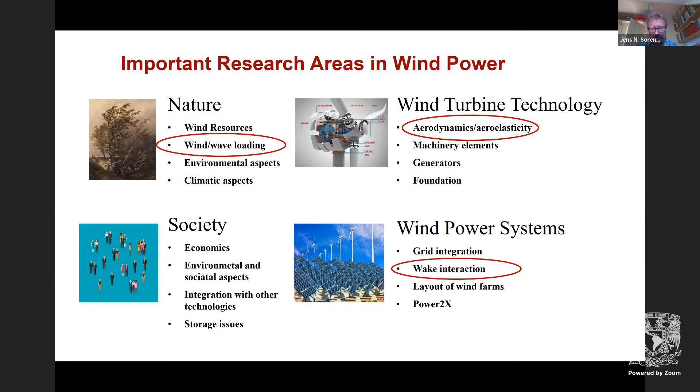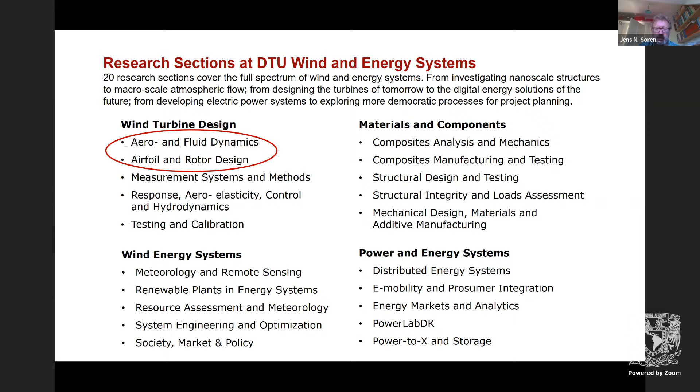So let's go a little bit into what we are doing in my section. What I normally say is we are doing advanced wind turbine aerodynamics, both modeling and experimental validation.

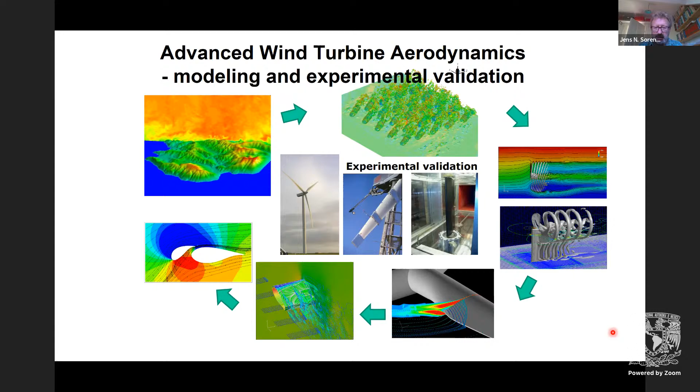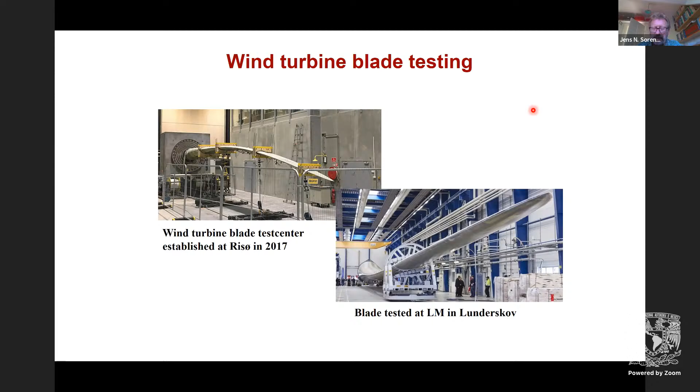And that's really a nice facility to have, and that also makes that we have a very good collaboration with industry, which we always think is very important when you're doing wind turbine research. The total number of people employed at the department is about 450 now, so it's quite a big department. We are only doing research with respect to wind power, but it is a big industry in Denmark today.

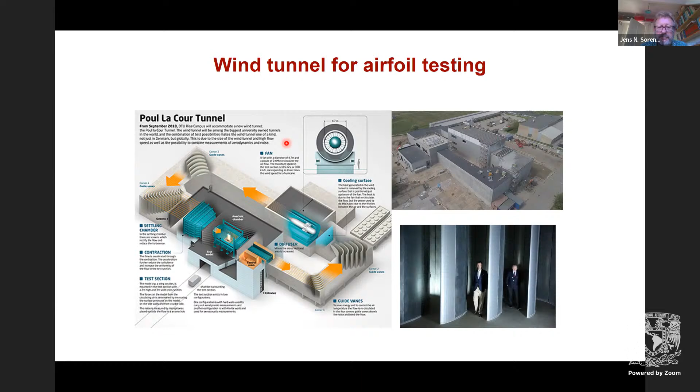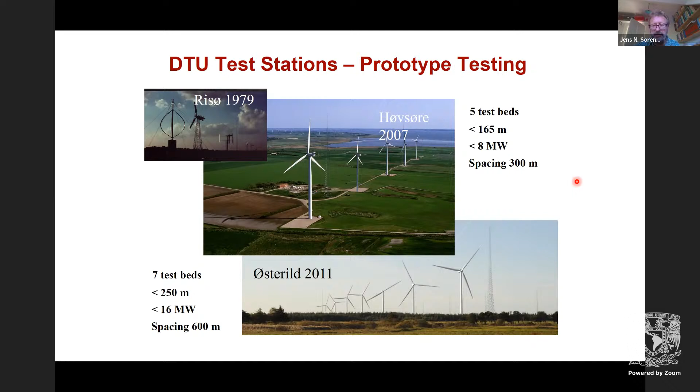And that we do for industry. In 2011, we even went out further and more close to an area very close to the ocean, Østerild. This is a picture from Østerild today, which is a national test center for large wind turbines. We have 7 places now for these wind turbines, and 4 of them are already occupied by companies. The rest we rent out to whoever wants to rent them, and they're fully booked all the time.

What we do here, we have a small group - I think there are 5 persons helping the companies do the experiments, with experimental equipment, but the data are of course confidential. So this is where the big companies run their tests.

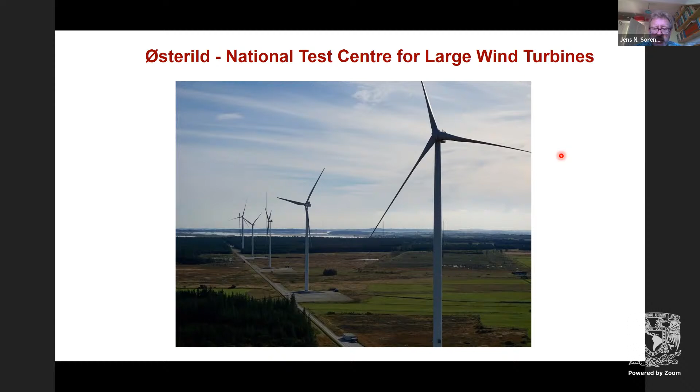A little bit back to what we are doing in my section. A lot of what we're doing is based on CFD, computational fluid dynamics, and probably no secret for any of the audience here, but the basic elements in CFD are that you solve the Navier-Stokes equations. You need to make mesh generation, you need to model turbulence, you need access to efficient computing algorithms or you need to develop some, you need access to high-performance computers, and then you need good post-processing facilities.

And today that has become really a standard. But we have developed our own CFD tools through the years, starting about 30 years back, and we have some tailor-made CFD codes that we use as part of our research. But I think many people now use OpenFOAM or other kinds of CFD tools that are available online.

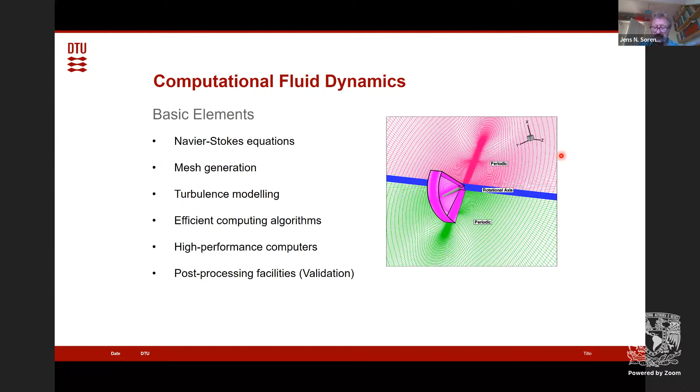Just to give some examples of where we use this, there's the EllipSys code. It has both a 2D version and a 3D version, and we use it for example for airfoil simulations, two-dimensional airfoil simulations. Then we use Reynolds-averaged Navier-Stokes simulations, or unsteady Reynolds-averaged Navier-Stokes simulations. These you can keep in 2D, and that is typically when we do design of airfoils. We use this technique.

Then, if you want to learn more about the aerodynamics on the airfoil, you go to 3D, for example large eddy simulation or detached eddy simulation. There are different types of closures you can use with respect to turbulence. And also we have started recently doing some DNS, direct numerical simulation. These do not demand any closure of your equations with respect to turbulence, but they're very computing expensive. But we can gain some information that can be used in your models.

Then we also have rotor and park simulations, and there are different kinds. A few of them are fully resolved geometry - there you can only afford typically to compute the flow for a single turbine in the near wake. Otherwise, you have to go to actuator line or actuator disk modeling. Then you can have more turbines in your simulations. I'll come back to this later.

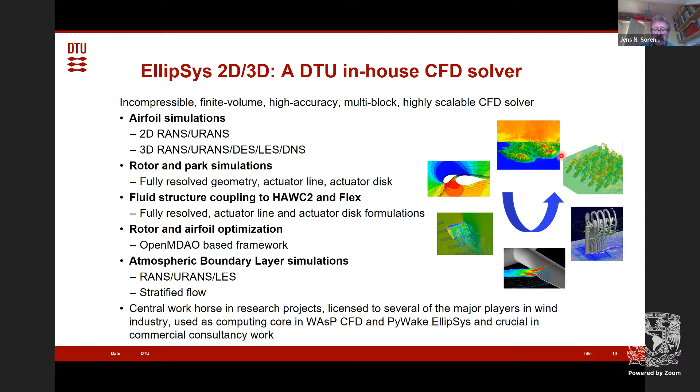So what kind of research do we do? One could say wind turbine aerodynamics should have been mature by now, but actually it's not. Some of the reasons are that rotors are becoming larger and more slender, so there's much more dynamics of large deformed rotors.

For a wind turbine rotor of more than 100 meters, typically it's pre-bent, and the deformation of the tip while operating can easily be 3 to 4 meters, which you need to include in your simulations. So this creates some complications.

Also, it's a complex geometry. When talking about grids, you need a grid that covers the rotor blade but also one that is steady. So you need interaction between these two, because the tower is steady whereas the rotor is rotating, requiring overlap between the gridding.

We've also looked at new concepts like introducing adjustable trailing edge flaps, as you have on aircraft. We tried to simulate that, and also tried to put a real trailing edge flap on a megawatt turbine to see the effect of that.

Also, wind turbine blades today always use what we call aerodynamic accessories - for example vortex generators. There could be blowing, Gurney flaps, or roughness tape, but at least vortex generators and roughness tape are really inherent in nearly all design of wind turbine blades today. So we need to be capable of modeling that as well.

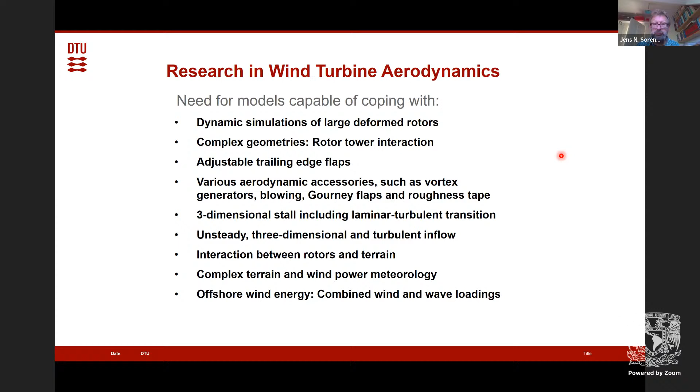But first, let me go back to a very old, relatively old simulation - the first CFD simulation, probably the first ever. That was done by my colleague Niels Sørensen, in association with the American blind test competition in 2000, so it's a little bit more than 20 years back.

What he showed in these competitions - if you follow here, you see the red spots on this blade, which was tested in the NASA Ames wind tunnel, where there were pressure taps. So it was a blind test - nobody knew about the results. And when we saw the results from a lot of research groups worldwide, there was a big scatter. But there was one simulation that turned out to be very consistent, coinciding with the experimental data, and that was this CFD simulation.

As you can see on all cross sections, the solid curves are the computations, and the circles are measurements. And it's a pressure coefficient.

This is not so important, just to show you that everywhere there was a very good comparison, both near the tip and near the root, except at one place. If you look, the measurements did not show any trace of a pressure peak or suction peak, as you have here.

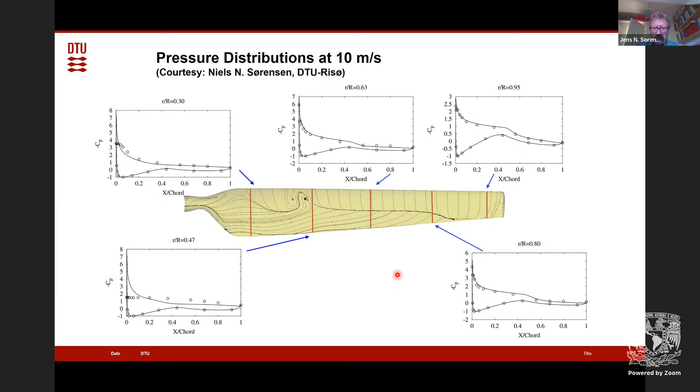So that was actually the first eye opener that doing CFD on wind turbine blades is very important, and that you can actually gain some new knowledge compared to what you otherwise would have. Since then, we have used CFD for many different purposes.

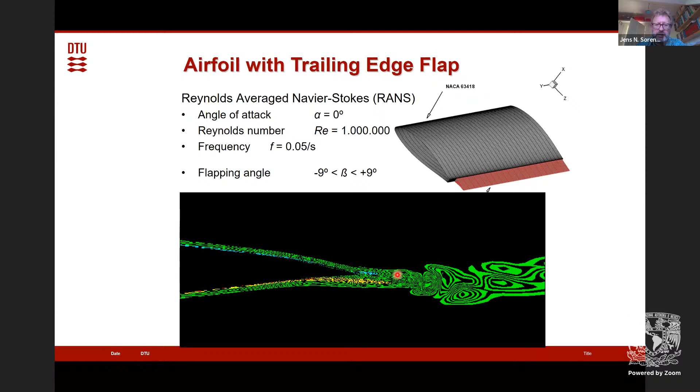For example, we have looked at airfoils with trailing edge flaps, as you can see in a simulation here, to see what are the effects if we can control some of the flow behavior around the airfoil. That's one case. Another thing here, we use the CFD technique for design of airfoils.

You can see here the dynamics of doing different simulations. Wind turbine airfoils have very specific properties. They are actually very different from aircraft airfoils, because they need to be insensitive to roughness.

That typically means, as you can see here, that the leading edge gives a very specific shape, which looks a little bit like a whale, the shape of a whale. That is because you want transition to take place before you reach the suction peak.

So in order to have this phenomenon where you get insensitivity to roughness - the reason why you want that is that roughness will always appear because of things like insects in the air, dust, rain. Therefore, you'll always have a surface that is not exactly equal to a smooth surface as you have on an aircraft. And you never clean a wind turbine blade - you don't do that because it would be very expensive, and many times you can't do it.

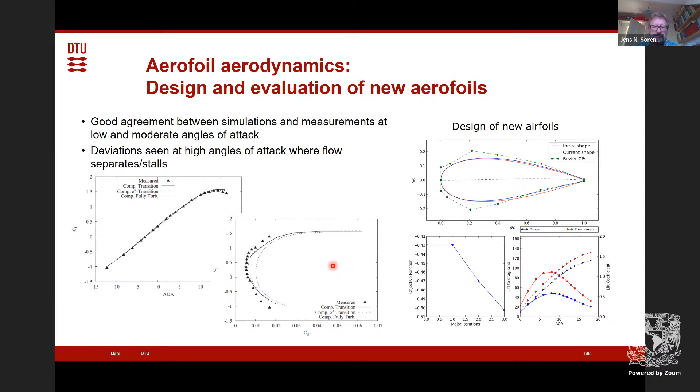Another thing we also use the CFD for is to extract airfoil data, which we call 3D airfoil data. They are different from the 2D ones because, due to Coriolis and centrifugal effects, they are modified.

They're actually mostly modified near the root, where typically you also have separated flow. But by doing analysis of the resulting computations, you can actually come up with corrections for the measured airfoil data - the airfoil data that's measured in the wind tunnel.

We have done this many times, in different ways, and it seems now it is actually possible to come up with very good corrections for these 3D effects and put them into some simplified formulas. But everything is based on the CFD simulations here.

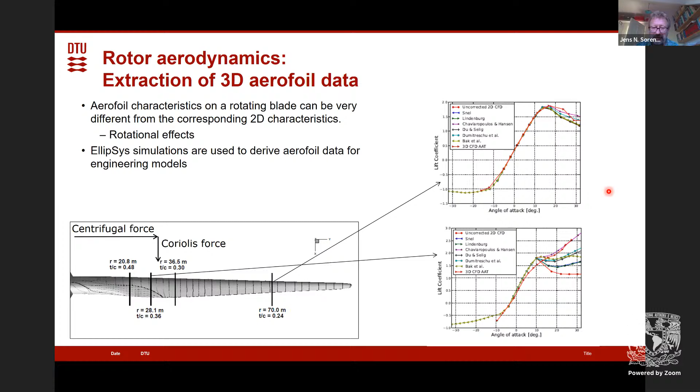Also, the vortex generators I mentioned before - we do some research on those. So we have developed a new type of vortex generators, as you see here. They are kind of shaped like a delta wing, and they are a little bit better than the usual ones.

We hope we have a contact with a company and hope that they would be interested in developing it further and maybe using them in production.

In this case, we have actually put them into our CFD solver and solved for the full flow field. So there are essentially two ways you can do a CFD simulation along a surface with the vortex generators. The way they work is that they create two strong vortices behind them, which helps mix the boundary layer with the ambient flow, and that strengthens the boundary layer and makes it stronger towards adverse pressure gradients.

But the other thing is, if you want to do it for a full blade, you cannot model them in detail, so therefore you need to put body forces into your computational tools. We have also done that. So you can both design a blade with vortex generators, and you can design the individual vortex generators in order to give them optimum performance.

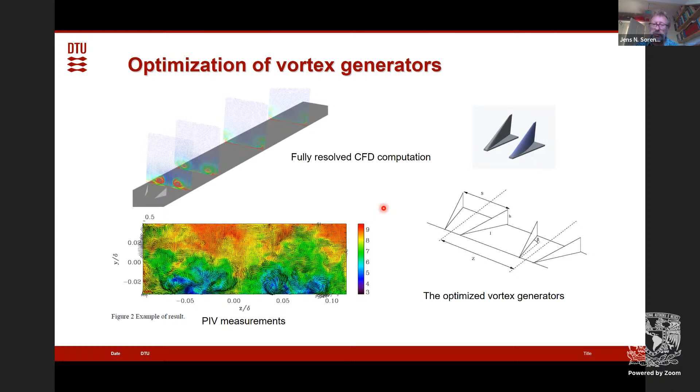Integrated aerostructure design is something we're working on now. We have a lot of computing codes that we need to combine, because they need to go into the details of what materials you use for the blade and how the inner structure of the blade looks like. That means you optimize the blade not only for performance, but also for lifetime, for example, in the same process.

This is an example of this, where I won't go into detail, but we have a lot of different codes you can put in. You can increase the complexity of types of materials and also the design of the inner part, and you can gain a little bit on that. We hope that in the long run some of the wind turbine manufacturers will start to consider this, because they can save a lot of money by saving material when they design the blade.

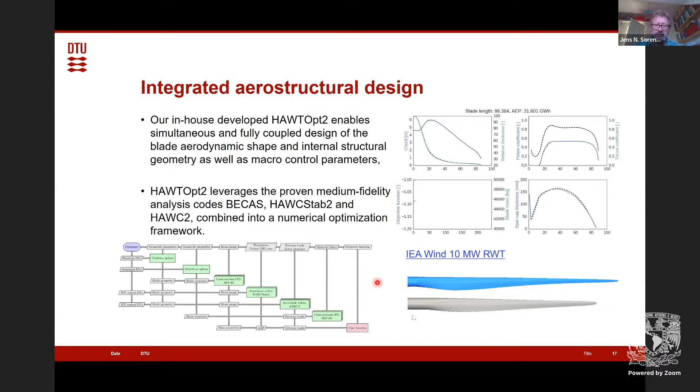This is a little bit the same here. We have different techniques, but one thing that's very important is to have an adjoint solver, in order to make huge computations, looking for steady solutions and design solutions. We are working on this adjoint solver and are pretty close now to having a fully developed adjoint solver for this EllipSys code. This is work that has been going on for, I think, 5 years now, but we are getting closer.

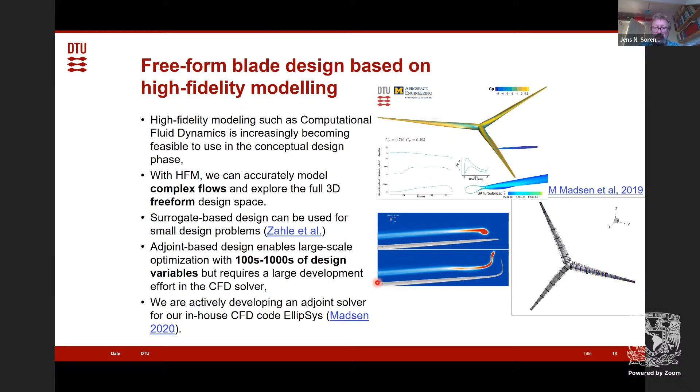Just to finish about the rotor stuff, we are doing this too. For example, we have been looking at winglets, as I mentioned before, rotors with slats. We have been looking at hub design, specific hub design, and also putting in vortex generators. So just some examples of CFD use.

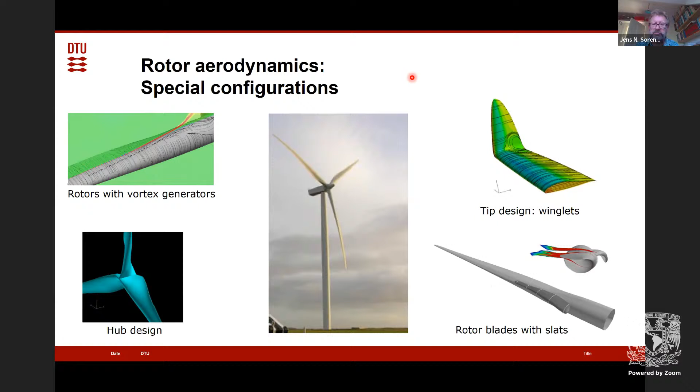But now I'll talk a little more about the actuator disc and line technique. Up to now, everything I talked about is when you have a fully resolved rotor. The point is, if you want to go into a wind farm, you need to do something with the rotor, because you simply do not have the computational power to resolve the boundary layer on a rotor blade at the same time as you want to solve the flow in a wind farm. So you need to focus on part of it.

That's why we developed this so-called actuator disc or line technique. The basic idea is that we replace the rotor blades with body forces, which we determine from airfoil data, and then the flow is simulated typically by large eddy simulation. What you see here is a domain, and it can even be long. Now this is only one turbine, but it could be a complete wind farm. You typically use an actuator disc, sacrificing some of the mesh points on the blades or rotor disc, and instead use them for the large scale structures in the wake.

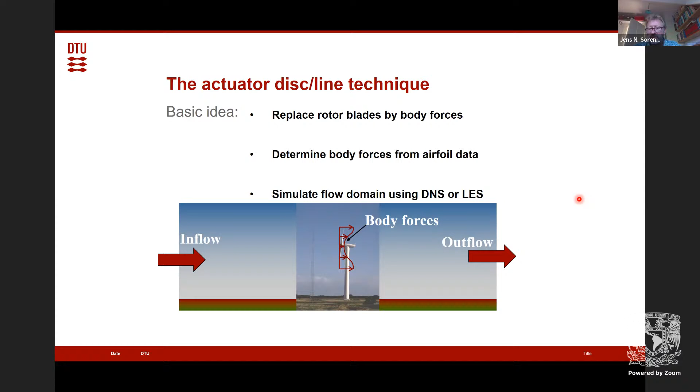The basis of the actuator disc and line modeling is that you use the filtered or average Navier-Stokes equations. The load model is based on airfoil data or prescribed from prior knowledge of the turbine. In the actuator disc model, the forces are distributed on annular elements on the rotor disc. In the actuator line model, the forces are distributed along lines representing the blades. Then you need a turbulent inflow model to represent the atmospheric boundary layer. Very importantly, you need a regularization function to control the force distribution, and there can be different correction tools for tip effects or finite aspect ratio errors.

That's the basis, and I won't go too much into detail, but the idea is that the red line here is the actuator line, essentially the blade, and then you have a grid, which could be Cartesian. You simply interpolate between the two: from the grid you find the local velocity field, which you transform to the line. On the line, you compute the forces, which you then, through the regularization function, put onto the grid lines. Then you can do a simulation without knowing all the details of the rotor blade.

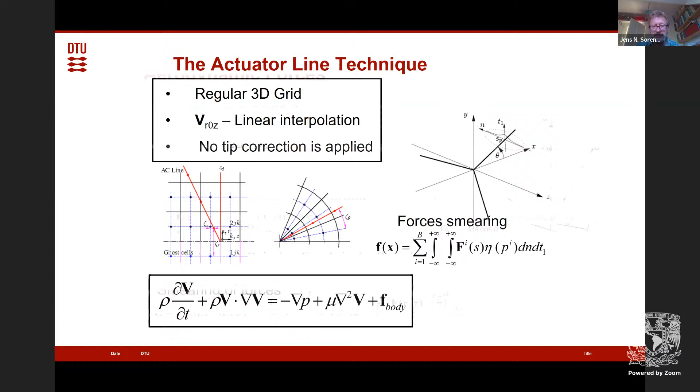And what comes in is a body force into your Navier-Stokes equations, as you can see here. Here's an example where if you want to use a blade element theory to find the forces, you can do it in the very same manner as you do for a blade element momentum theory.

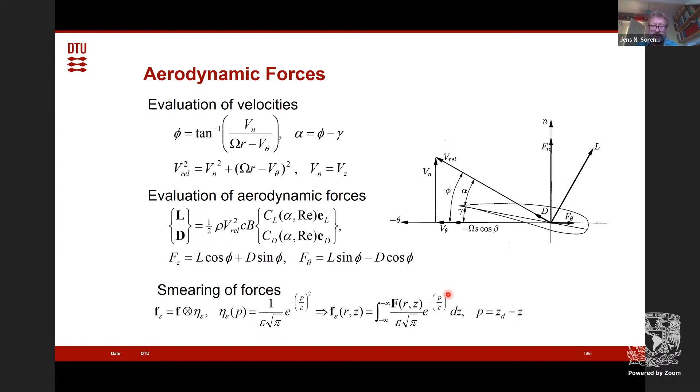But we've also been working now on putting in generic forces, and I had a few papers recently on that, a new model where you can come up with analytical forces, so you don't have to know actually what kind of airfoils you're using.

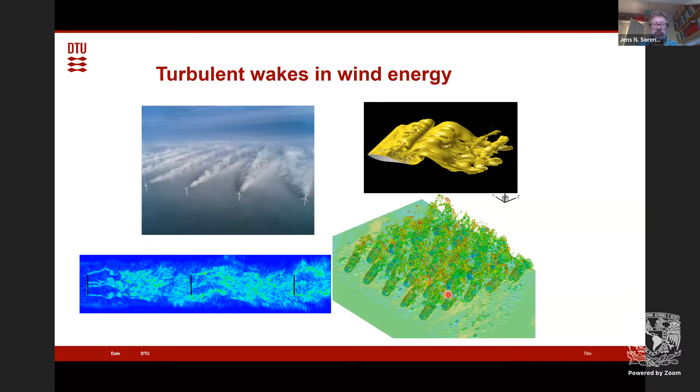And what do we use it for? Well, we use it typically for studying wakes around clusters of wind turbines or for full wind farms, as you can see here. So depending on what you want to look at, you can do either the actuator disc or the actuator line modeling. It is simply to make simulations capable, or computers capable, of doing these simulations.

So if you look at scales in wind energy, we have some characteristic length scales going from, say, the boundary layer of an airfoil, which is in the order of a millimeter. If you take a rotor, the length of a rotor is in the order of 100 meters. The size of a wind farm is in the order of, say, 10 kilometers. So there's a really huge range.

So all this you can of course not cope with in one simulation. Therefore, with this technique here, we are restricting ourselves to something that goes from, say, the airfoil chord up to the wind farm size. And that suddenly makes it possible to do the simulations.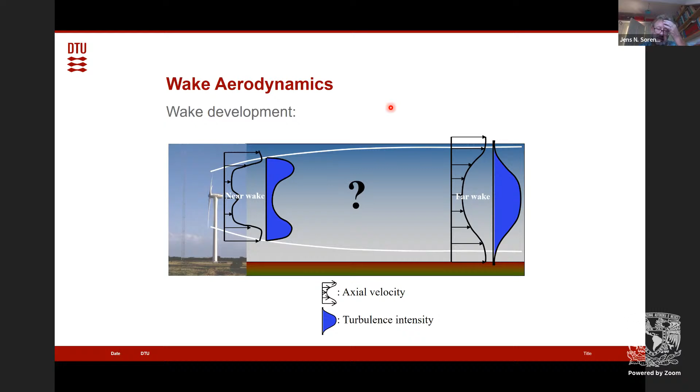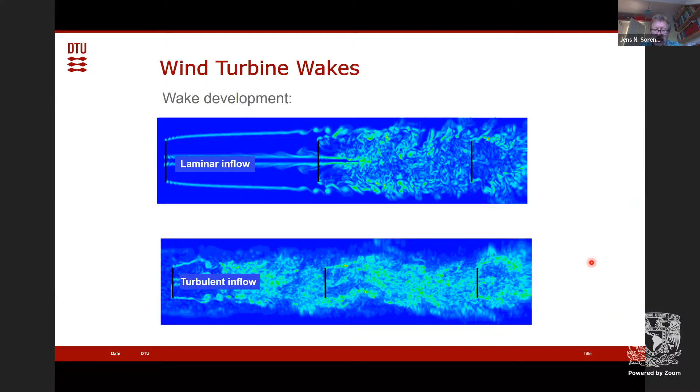But there are some very basic research questions still when we talk about wakes and wind farm aerodynamics, and some of them we have answered, some we are still working on. For example, what is the relationship between the strength of the vortices and the blade load? That we know very well today, actually. How important is the dynamics of the vortex system? That we know more about now also.

What are the conditions for instability? What do we mean by near wake and far wake? Can we come up with a more clear definition of that? What is the relation between the dynamics of the vortices and this large-scale meandering, or the movement of the whole wake? Then the question about added turbulence intensity - how do we model that?

So we have the turbulence in the inflow, but we also have the turbulence generated by the wind farm itself. How do we cope with these such that they can be added, and how is that related to the loading?

Then, of course, performance predictions and optimum layout of wind farms is very important. We also need to find the lifetime estimation of the turbines in a wind farm. And then, of course, atmospheric stability is important now. And also wind farm to wind farm interaction is very important. So there are many questions.

Every second year, together with Stefan Ivanell, I'm running a conference in Sweden on wake and wind farm aerodynamics. There are about 100 persons coming there now. So it's a very nice conference, actually, at the island of Gotland in the Baltic Sea.

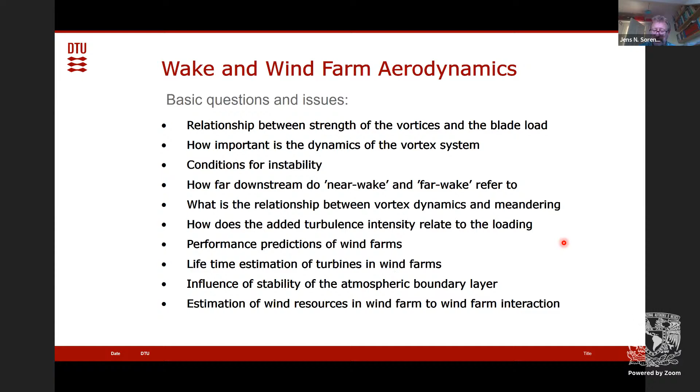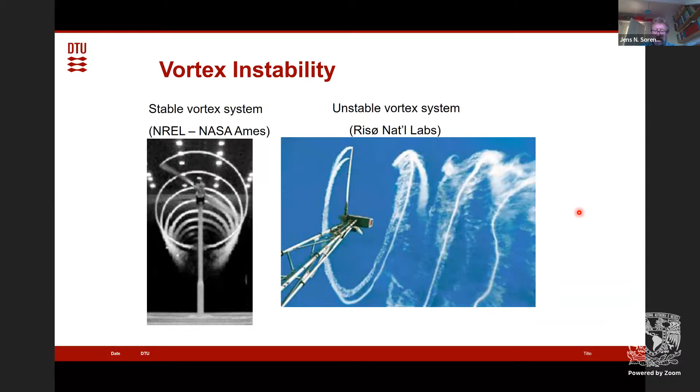I did some work with Valery Okulov. It's years back now, but we did a stability analysis which was analytical, on tip vortices, using the so-called far wake model of Joukowski, where we simply assume that the tip vortices form helical structures. And from that we found that the vortex wake behind the wind turbine is unconditionally unstable, so it will break down.

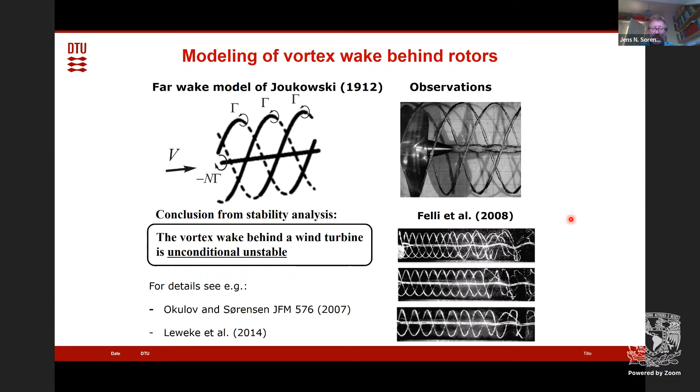We have seen this later on from many different experiments, but some of the very first was from Felli, which you see here, showing a breakdown of the tip vortex after a ship propeller. Today there's been a lot of research on this, so it's really now pinpointed what is the background for this instability. It is this mutual inductance instability we see, typically because there's an interaction between the vortices themselves. It's a little bit complicated because they're helical, but it is essentially this phenomenon.

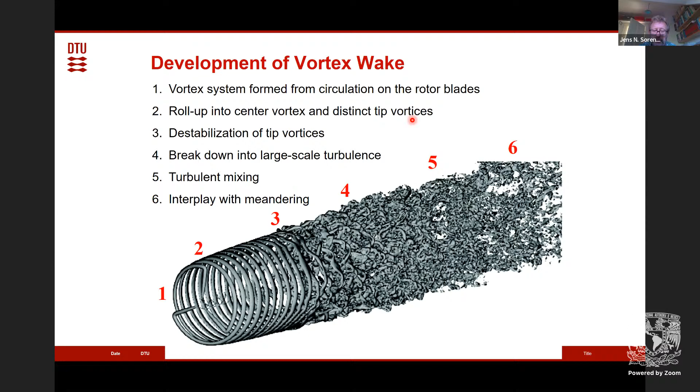We like to distinguish between three areas. The first part where you have linear amplification, and the next where we call it nonlinear transition, that's where all the scales start to merge. Then you have the last part where you start to have a Gaussian velocity deficit, and when that appears, then we are what we call in the far wake.

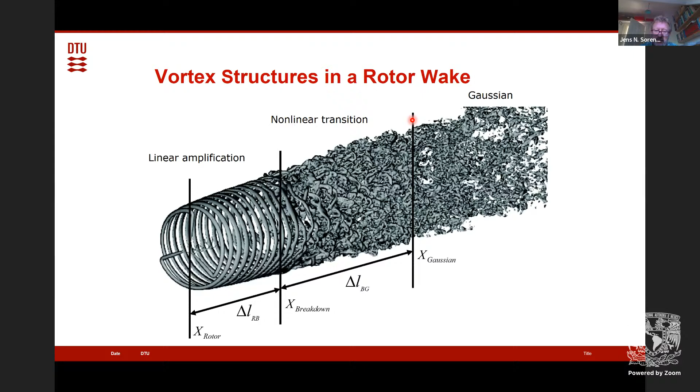We have done some stability analysis numerically to detect how this appears, and I'll just show you briefly some results from that. What you see here is the flow on the rotor. Of course it's rotating, but we are in a rotating frame of reference. So what we do here is we put in some perturbations in the loading.

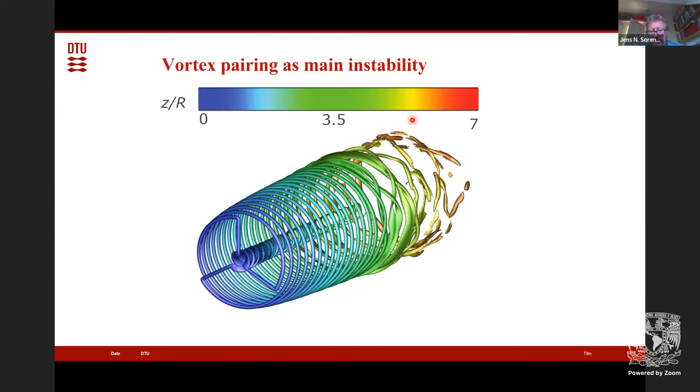You can see how that propagates downstream and eventually gives an instability. We see the same here from the side — you can see that it starts a little bit in the middle here. There's always something at the very end here, but that's due to the outflow condition, so what you should look at is about here. Then you can see it starts to move — that is vortex pairing. These vortices start to pair with each other, and there is actually a very nice theory developed by Lamb originally about this vortex pairing that we can use.

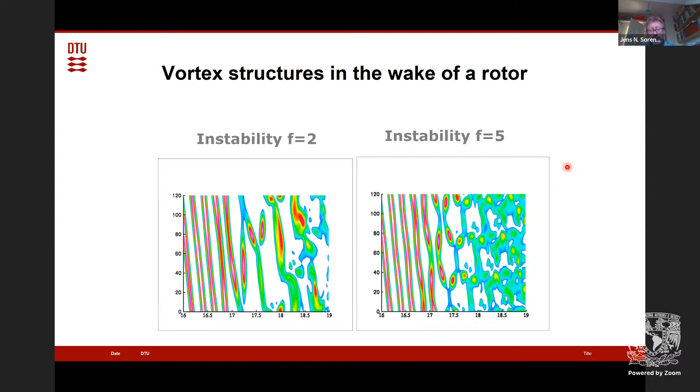We have also looked into different modes, and it turned out there are some specific modes that are much stronger than others. I won't go into detail, but let me show how we could model the length of the wake by dividing it into two groups: the first where you have linear amplification, and the other where you have nonlinear interaction.

For the first part, here the wind turbine is located here, and this is just an axis measured in rotor lengths. We put in a perturbation and look at the amplification of that perturbation. The perturbation can have different amplitudes: large, medium, and small.

From the rotor position, we follow on the screw surface of the tip vortices the amplification, and we find the amplification rate, called sigma. It looks like that - very classical amplification theory, with an exponential amplification.

At a certain point downstream, it stops being linear and becomes nonlinear. We could call that the very near wake. After that, there's a nonlinear transition, as you see here. Depending on how big the initial perturbation was, this happens at different positions - the smaller the perturbation, the longer it takes before it breaks down. The slope here is actually the sigma.

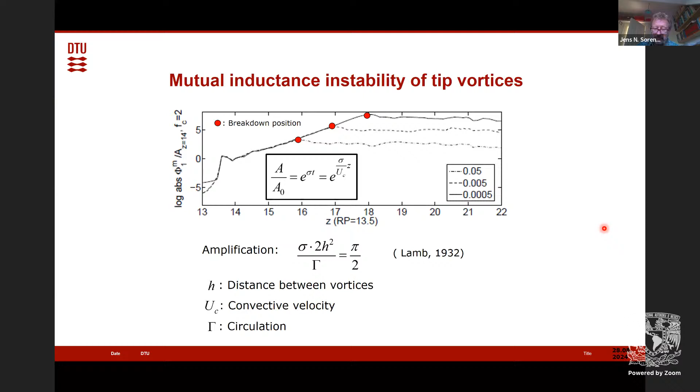This is what we do here. If you take a typical helical shaped wake, as defined by Betz in his very pioneering PhD work back in the 1920s, we can use the geometry of the wake to find H, and relate it to the number of blades, the tip speed ratio, and other properties, as you see here - along with the convective velocity. But this is pure geometry. If you assume constant loading as an approximation, you can find the circulation from this expression.

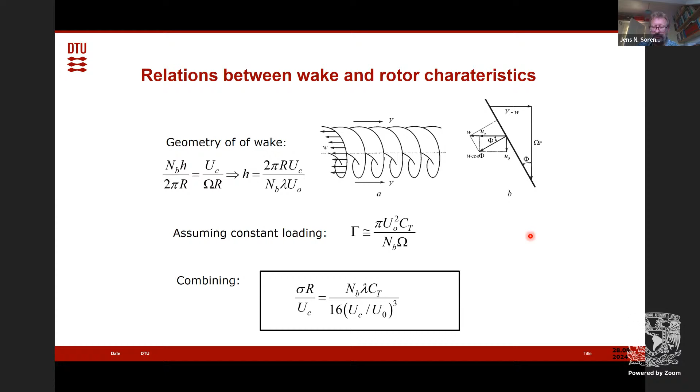So suddenly you have an expression for the dimensionless amplification rate, which looks like this. I know this is a bit technical, but it's just to show how it works. All this can be related to an equation as well - I'll just show the final result here, which gives an expression for the near wake.

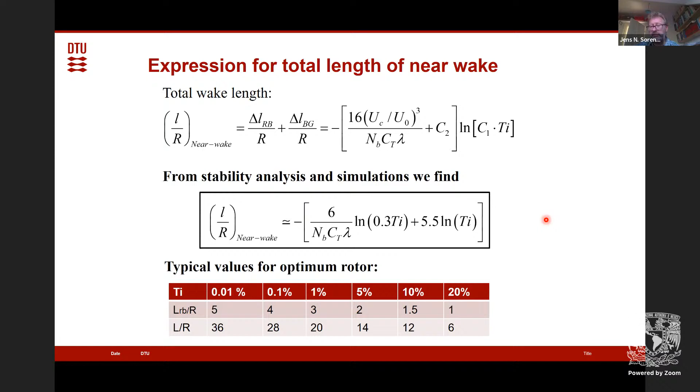That is the length of the near wake. The first part here is the linear amplification, and the other part is where you have the nonlinear interaction. You can see the length of the near wake is inversely proportional to the number of blades, the thrust coefficient, and the tip speed ratio lambda, and proportional to the logarithm of the turbulence intensity. We've validated this, and it seems to work quite well. It can be used to find the near wake length before the flow becomes fully turbulent downstream of the turbine.

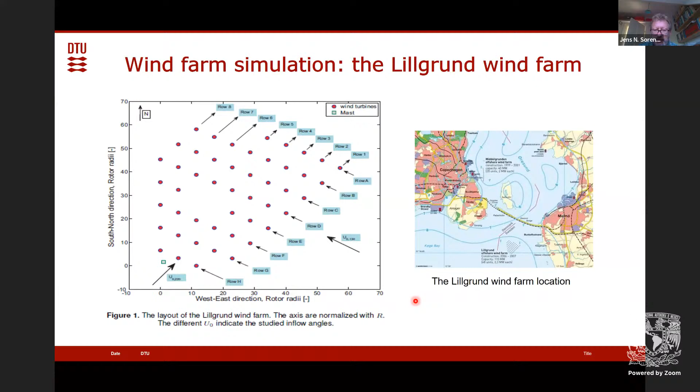And the result came up was like this. So here, if the first wind turbine in a line has a power production of 1, then the next one has only about 30% of that. And that counts for all the rest because of wake effects when the wind is along the line.

On the other hand, if you take a line where you are missing a turbine because it was not put there, then suddenly you'll see that the turbine that is number 4 has double the production, because the wake has time to recover due to mixing, etc. So it will produce double as much as the turbine you have over here. So actually, you could say you save the expenses of 1 wind turbine by having that hole.

And of course, what that essentially tells us is that you need to optimize the layout of wind farms. This work is from 2015, and I showed it because it was the very first wind farm simulation ever with actuator disc model, which I did together with Carl Nilsson from Uppsala University in 2015.

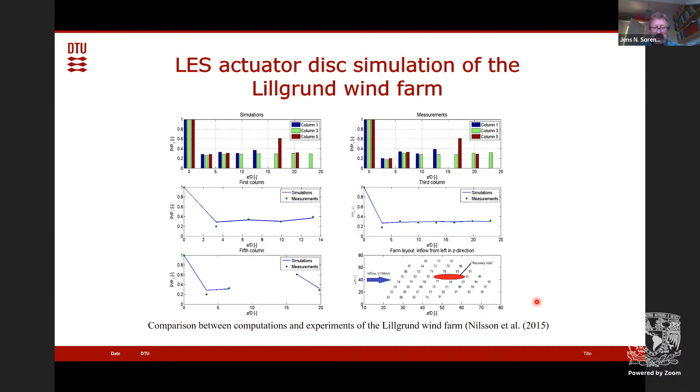We have also been looking at simulations where we have an interaction between the land and the wind farm. This is the eastern part of Denmark you have here. And then there's a wind farm out here, which is called the Anholt wind farm. And there you can see from simulation, a RANS simulation by one of my colleagues, Paul van der Laan.

You can see that there are different effects, both from the land side and also from the layout side. So where you have a red spot is where you have high power production, and the blue spot is where you have low power production.

And you can see due to the influence of this peninsula, this part here for winds going in this case from the western direction, will have a smaller production than at this part here, where they are not in leeward from the land side. So that gives also an idea that it's important to do these simulations.

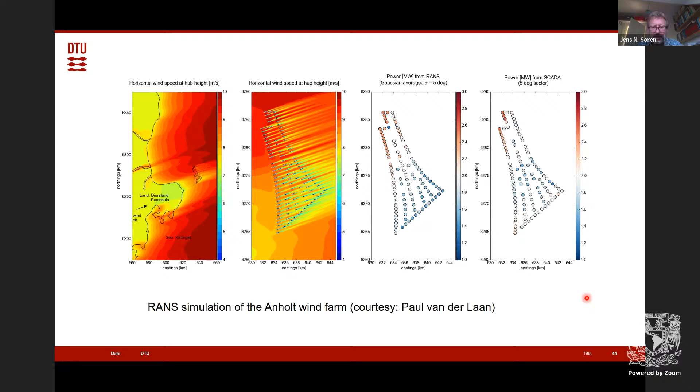And then I think, well, this is not so much important here, but then this is my last one here. That is for wake modeling in complex terrain. What we do here is you have a terrain where we are solving the Navier-Stokes equation around, so we have an idea of how the flow looks like from CFD computations.

And then we do an analytical wake assessment. So after each wind turbine, we simply put in a wake that corresponds to that wind turbine, and then we see if it hits other wind turbines. And then we can do a simulation in which only part of the flow needs to be solved.

So you don't need to take into account the wind turbine at first, but you do it in the next step. And that makes it possible to do a kind of optimization of where you are going to locate the wind turbines in the landscape.

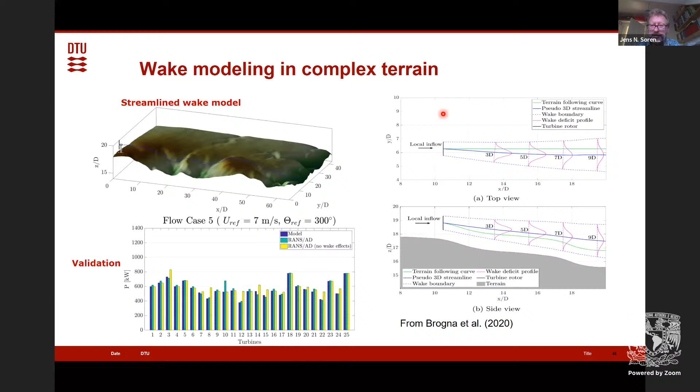Okay, I think that concludes my presentation here. I hope you enjoyed it, and I'm happy to answer any questions you might have.

Thank you very much, Professor. It was very, very interesting. I have a lot of doubts, but I can ask if there are any questions regarding the presentation. I think Eduardo has a comment. I don't know, his microphone is turned on. Professor? Okay. Yes. Okay. Thank you, Carlos.

If I can make a very, very general question. Thank you very much, Jens, for the presentation. Very interesting and very impressive work that you're doing at DTU. I was wondering, given that you have so much background and perhaps foresight for what's going to happen in wind energy in the future, given that there is evidence that the atmosphere of the Earth is changing due to heating, global warming, what do you think would be the impact on energy production in wind energy production, both from the economic point of view and from the technical point of view, that we should be aware of if we want to make interesting research proposals?